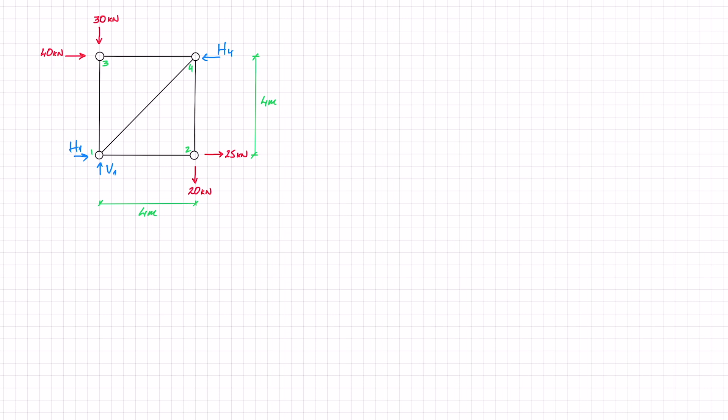Next thing we're going to do, we are going to determine if this truss is determinate. We do that by figuring out how many unknowns we have. Unknowns are the number of reaction forces and the number of members. In terms of reaction forces, we have 3. In terms of the members, we have 5. That gives us a total of 8.

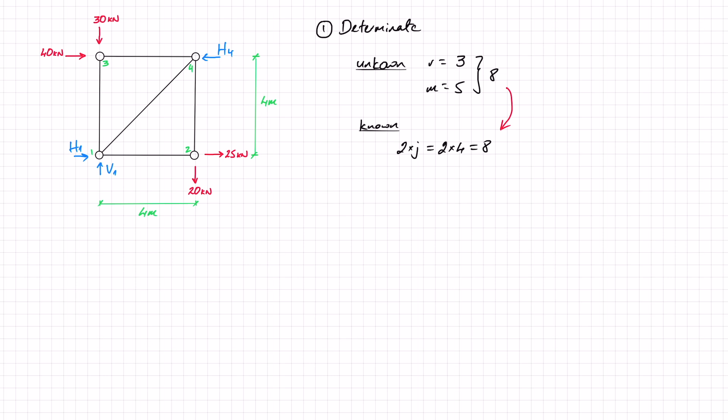Our knowns are the number of equations we can solve. For a truss, it is 2 equations per joint, so 2 times the number of joints. In our case, 2 times 4, and that is 8. Since the number of unknowns equals the number of knowns, this truss is determinate, and we can solve it using the method of joints. Step 2 is going to be finding the reactions.

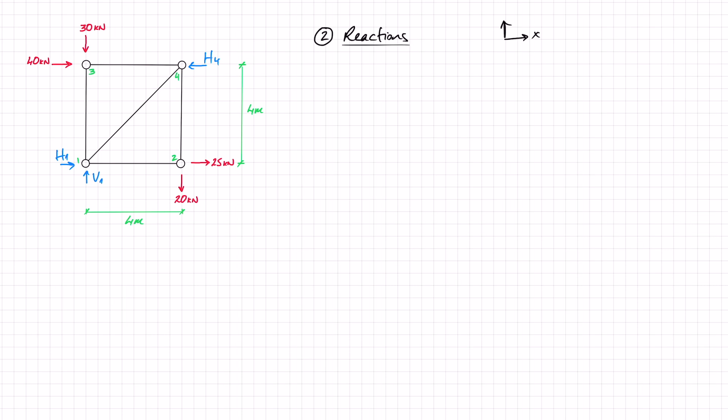If I look at the reactions on my drawing, I can see that there is only one reaction in the vertical direction, V1. So after I decide on the directions for my positive sign convention following the right-hand rule, I can do sum of forces in Y to determine that reaction, because it's the only thing that's unknown in the vertical direction. So I've got V1, minus 20 at joint 2, minus 30 at joint 3, and nothing else in that vertical direction, so that equals 0. And from here I can find out that V1 equals 50 kilonewtons. I'm just going to highlight that.

The second thing that I can do, I can do moments around joint 1. I chose joint 1 because that way I eliminate both V1 and H1 because they pass through joint 1. The 30 kilonewtons at joint 3 also passes through joint 1, because its line of action passes through. And also that force of 25 at joint 2, its line of action also passes through joint 1. So I do not have to consider them. So I'm left with the external loads of 40 and 20 and H4.

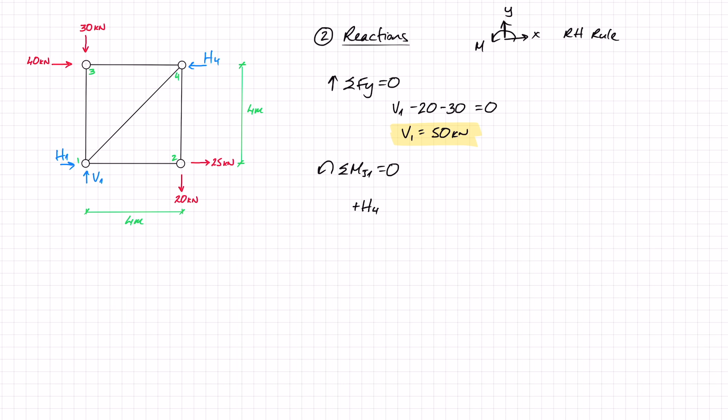Let's start with H4. H4 creates a positive moment, so plus H4, and the distance is 4. Then I have the 40 at joint 3. That creates a negative moment, so minus 40, and the distance is 4 as well. And then I have the 20 at joint 2, also a negative moment, so minus 20 times 4 equals 0. So we have 4H4 minus 160 minus 80 equals 0. So 4H4 equals 240, and H4 therefore equals 60 kilonewtons. Let's just highlight that.

And then the last thing I can do is the sum of forces in the x direction equals 0, with that being the positive direction. So I've got H1 minus H4, those are my two reactions, and then plus 25 and plus 40 equals 0. So H1, which is my only unknown at this point, equals H4 minus 65. So I end up with minus 5 kilonewtons.

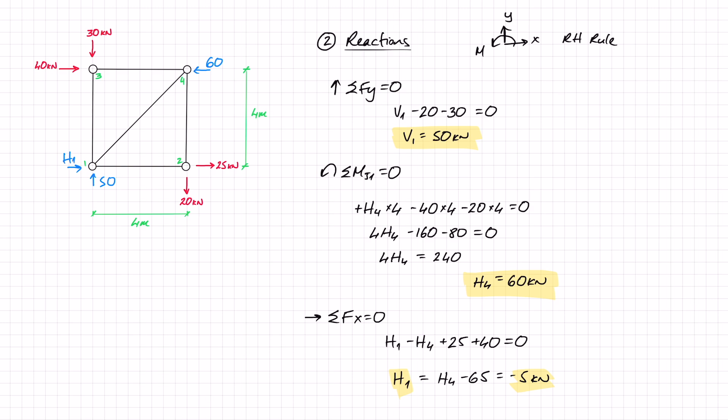Let's put these back on our drawing. So H4 worked out as 60, so let's replace this with 60. V1 was 50, so let's replace V1 with 50. And H1 came out as negative, which means that we assumed that it was going to the right. It's in fact going in the other direction. So let's put it in its correct direction and correct value. So we have 5 kilonewtons going this way.

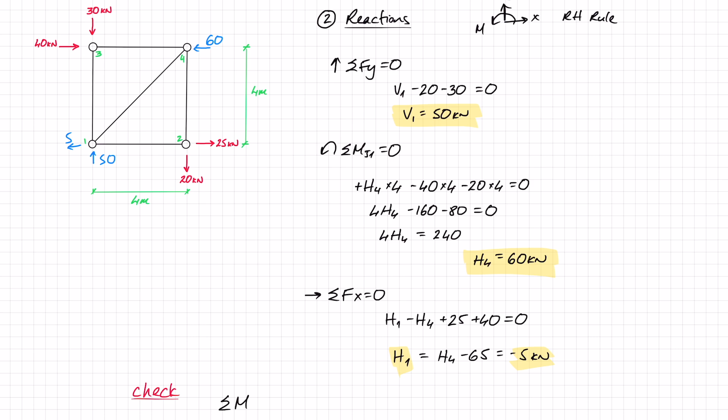And that's the reactions. I can do a quick check just to make sure that I got all those reactions correctly, by doing the sum of moments around, say, joint 4. From joint 2, I've got 25 in the positive direction, so plus 25 times 4. The 20 at joint 2 passes through, so that doesn't contribute to moment. If I go to joint 1, I've got minus 50 times 4, and I've also got minus 5 times 4.

At joint 3, the line of action of the 40 passes through, and I've only got the 30, which contributes a positive moment, so plus 30 times 4. And if we sum all of that, we will find that that indeed equals 0. So brilliant. That's a quick check on my reaction forces.

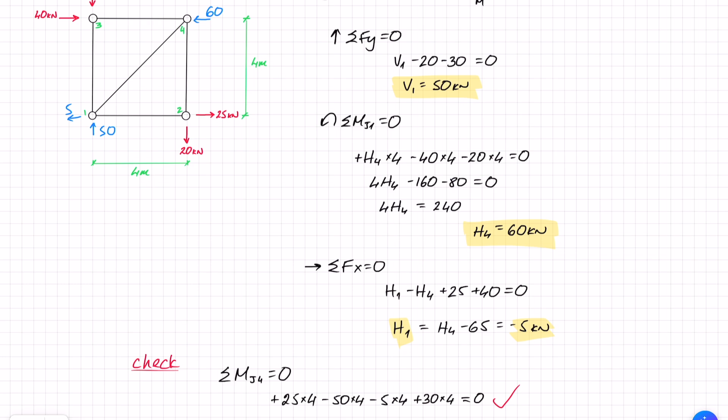So once I have my reactions, I can proceed to solving using the method of joints. If I look at my structure, I can see that joint 1 and joint 4 have 3 unknown members at them, so I cannot start there. But the other 2 joints have only 2 unknown members, so I can start at either one of these. Let's begin. So let's start off with joint 2.

Let's draw everything out. I'm using purple to draw the internal forces that I do not know. So I have F2,4, and I have F1,2 here. I also have these external forces of 25 and 20. And since everything here is at 90 degrees, this is a pretty quick and easy solution.

So let's do sum of forces in x equals 0, with this being the positive direction. I have 25 minus F12 equals 0, so F12 equals 25 kilonewtons. Looking now at the sum of forces in y equals 0, with this being the positive direction, I've got F24 minus 20 equals 0, so F24 works out as 20 kilonewtons. And that's it, we've already got 2 members.

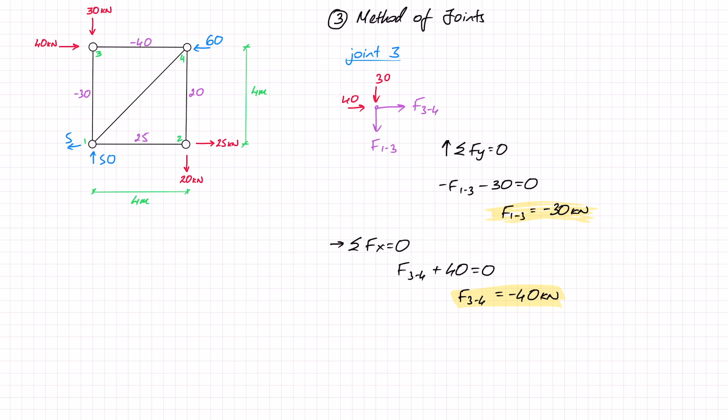And let's go and draw them back on our truss. So 1,3 was minus 30 and 3,4 was minus 40. And as we know here, because these two came out in minus, and I'd assumed initially that they were in tension, it means that both of these members are in compression. And now we only have one more member to find.

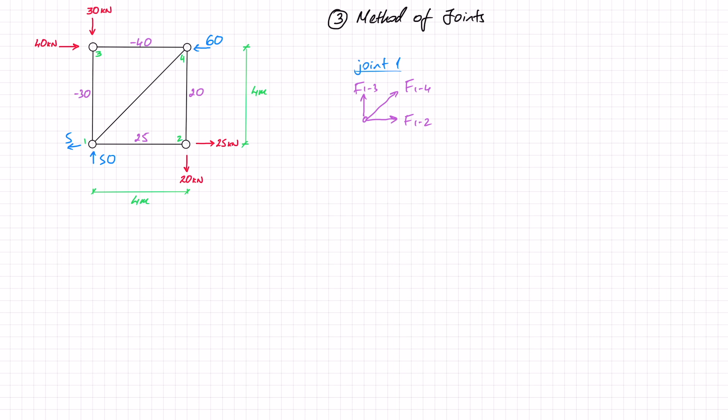So looking at the truss now, I can see that I can go to either joint 1 or joint 4, it doesn't matter, both of them only have one unknown. Let's go to joint 1. Once again, I'm going to draw all the internal forces in tension. So I've got F12, I've got F13, both of these are found, and I've got F14 here. I've also got these two reaction forces, 50 going this way and 5 going this way.

And I do know that the angle here, alpha, is 45 degrees, right? Because this is 4 on 4. It doesn't really matter where we start. Let's start off with, say, sum of forces in x equals 0, with this being the positive direction. So I've got F12 in positive x, I've got minus 5, because the 5 is in the negative x direction, and I have a component of F14, so I've got F14 cos 45, or cos alpha. That's all I have in the x direction, so that equals 0.

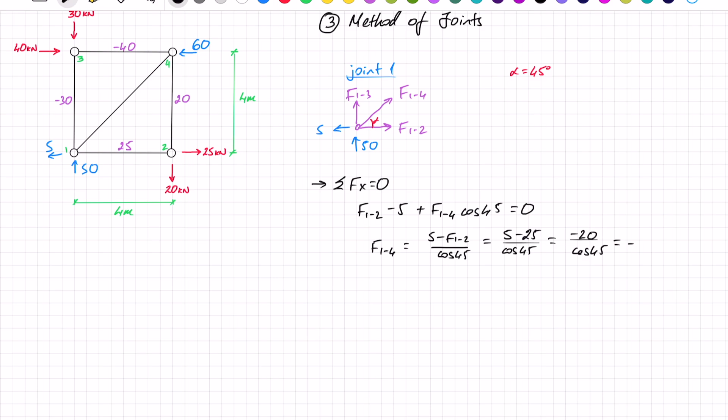So F14 is going to be 5 minus F12 divided by cos 45, and that is 5 minus 25 divided by cos 45. So here I've got minus 20 divided by cos 45, and that equals minus 20 square root of 2 kilonewtons. Now we have found everything that we need to find. We have all the members. Let's just write this last one here, minus 20 square root of 2.

But let's do a few checks, okay? So let's start off by using the y direction as our first check. So in the y direction, we've got 50. We've also got F13, and we've also got a component of F14 sine 45. So that is 50. F13 we already found, that is minus 30, and here we have F14, which is minus 20 square root of 2 sine 45.

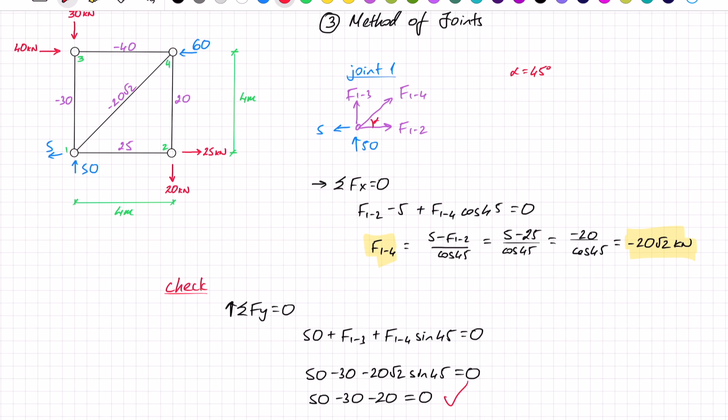If we work that out, that works out as 50 minus 30 minus 20. Does that equal 0? Yes, it does. So our first check gives us a good indication that we have solved this truss correctly. We can now go on to joint 4 and do checks in the x and y direction there as well to just double and triple check that we're correct, but I'll leave that up to you.